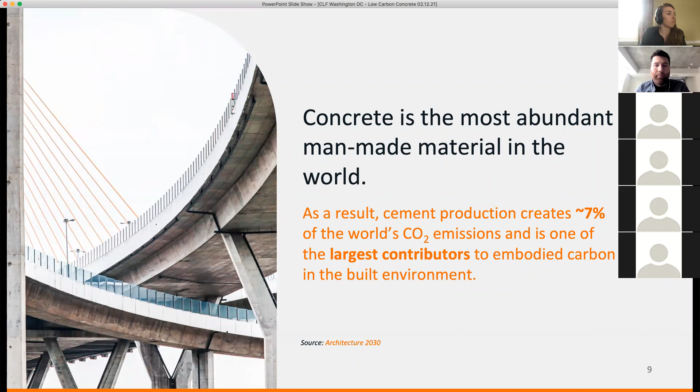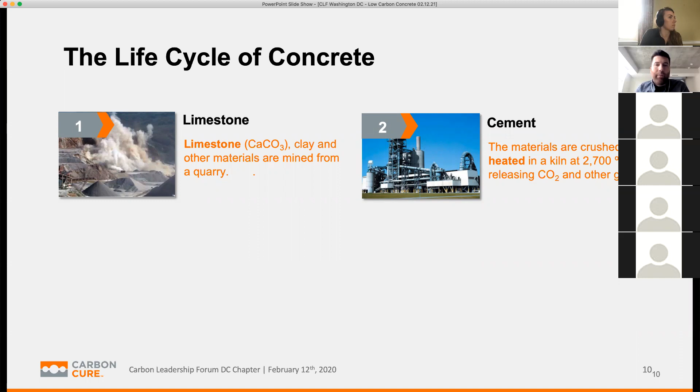When you look at how concrete is made, it might not be something you spend a lot of time thinking about. Concrete really originates from the natural world. It starts off as limestone in a lot of respects, a natural material that we are mining from different areas in the country. Limestone from a chemical perspective is known as calcium carbonate. Other materials like clay are mined from quarries, and they're ultimately taken to cement kilns where they are crushed and heated up and processed, at a really high temperature of 2,700 degrees Fahrenheit. That process itself is quite carbon intensive, which I'll explain in a second.

Once you have cement products, you can make the great material we're here to talk about, which is concrete. That's probably the thing you're most familiar with seeing, these trucks on the road coming from Vulcan and Superior and other local producers, ending up ultimately at job sites. For those of you on the development and design side, you will see these trucks arriving, pouring the concrete, and that's ultimately what we have to live in, work in, play in, that structure.

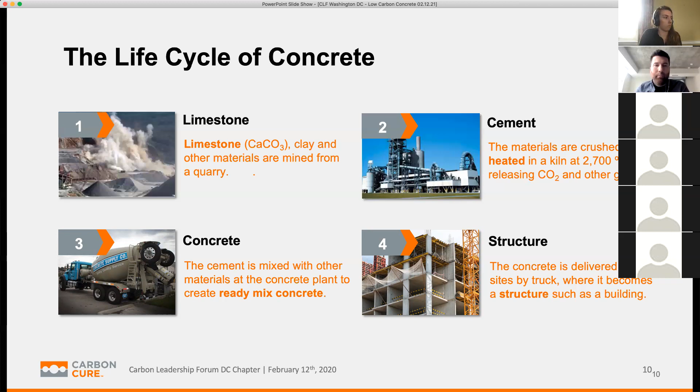Looking at that outline, if you want to understand carbon with concrete, you really need to think about understanding cement specifically. As much as 80 to 90% of all carbon emitted in the manufacturing of concrete occurs in that second stage, the cement manufacturing stage. That number can be lower, it really depends on a lot of regional factors, but generally speaking, cement is always the largest source of carbon inside of concrete. One analogy to think about, if you want to distinguish cement and concrete, cement is more like a sugar or a flour, and the concrete is more like a cake or the end product. Keep that in mind. Cement and concrete aren't the same thing. They're commonly confused, but cement is really a constituent material of concrete.

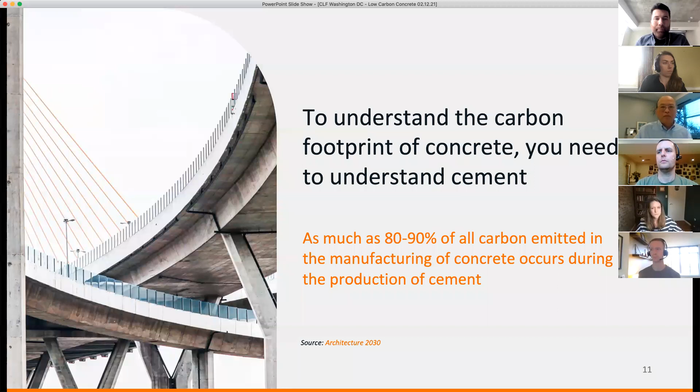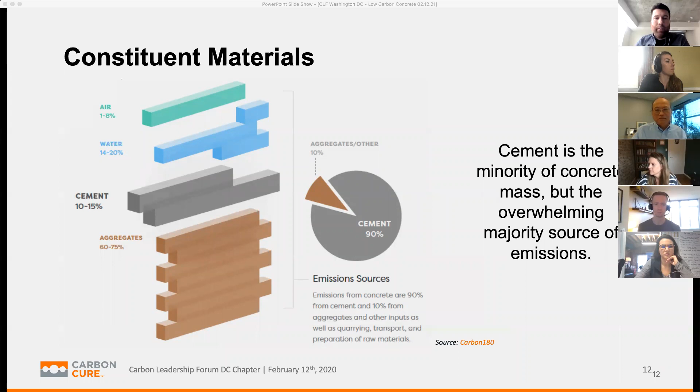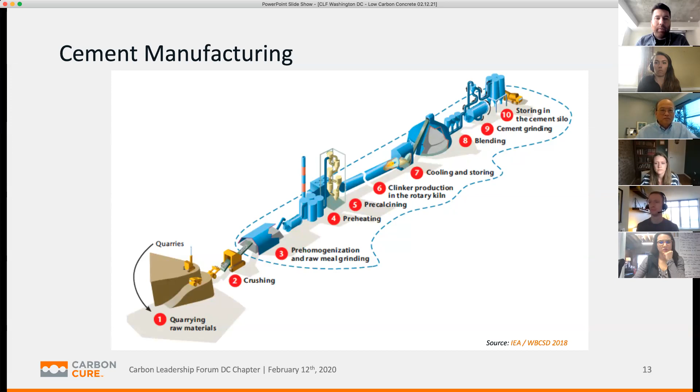Looking at that process, I want everybody to have an appreciation for just how challenging it is to decarbonize this sector. Everybody wants simple, straightforward solutions to getting to a low carbon future. But when we talk about cement in particular, this is not an easy thing to do. The reason is that unlike a lot of other sectors, where you could just switch to a green power source and see pretty significant carbon reductions right off the bat, in this case, when we talk about cement, we're talking about a process problem.

The process problem is that everybody wants cement products to be used for construction, but what they don't acknowledge or realize is that to get to that product, you need to actually manufacture CO2 as a byproduct. Cement's origins are largely limestone, or calcium carbonate. When you heat that up under pressure in a kiln, you end up getting a split in that molecule, which leads to the production of calcium oxide as one half, and pure CO2 as the other. So for every ton of cement manufactured in the United States, somewhere in the order of 1.04 tons, like a 1-to-1 ratio, of CO2 is manufactured.

That's something to consider for all of your projects. Every pound, every ton of cement that gets purchased, that's the direct impact associated with that material. This is an interesting, unique challenge. Keep in mind that cement producers are doing a lot of things, but this is a fundamental chemistry question, not so much a judgment or choice question.

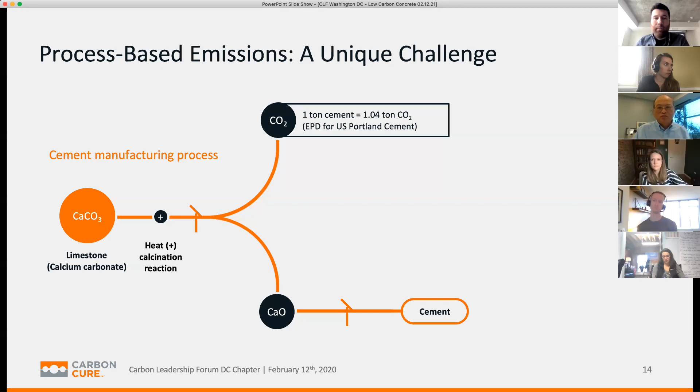Once you have cement products, then you get the rest of those materials I was showing in that previous image, the other constituent materials of concrete: the sand, the stone, the gravel, water, different admixtures, whatever it is that you need to make the product. And then ultimately you have concrete.

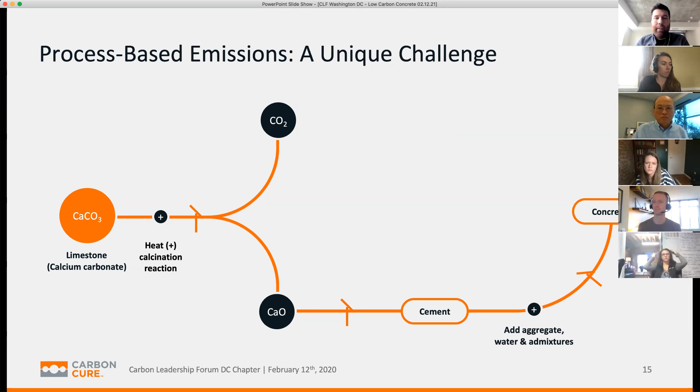Let's switch tactics here and talk a little bit about what is the carbon content of concrete. What do we actually know about that? And if you wanted to make decisions around carbon content of concrete, what would you actually have to do? That may sound like a basic question, but it's actually quite complicated, because we're looking at materials and trying to say, okay, this is how much carbon is inside of it, if I wanted to make a decision based off of that.

The answer here is there's new tools coming on the market around life cycle assessment and environmental product declarations that are meant to try to answer this question. The easy analogy is if you go to the grocery store, you might be looking on the back of a carton of milk, and it might say there's this many calories, or this much sugar, or this much fat. That's meant to help inform you. These products are meant to do the same thing, except around environmental impacts of materials. So for those of you involved in LEED, this is old news.

You don't need to hear me tell you about this, but in general, these are tools that are meant to quantify the impact. And they do that using a really complicated set of assumptions around what the energy sources are, where materials are sourced from, how far they have to travel to job sites. There's lots and lots of different assumptions built into it.

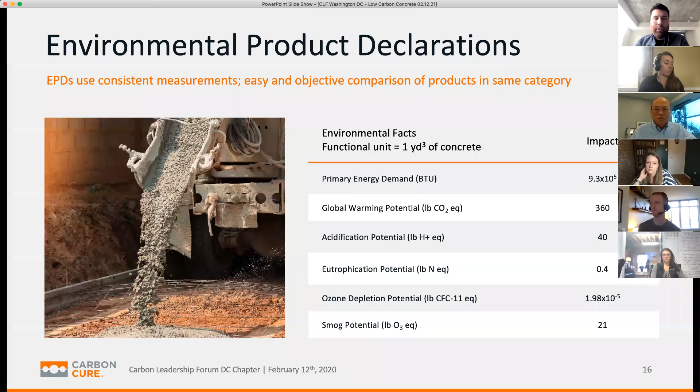So what you would do with those EPDs if you wanted to know the carbon content of your project is look at the material quantity you're talking about. Let's say you're buying 10,000 cubic yards of concrete. From the EPD provided by the producer, the average carbon content of that material is X. You would multiply those two things together and add them to other calculations for other materials, and then you'd get your whole building estimate for the carbon content.

So the key thing to consider here is we're talking about embodied carbon. We're really talking about a comparison or comparative analysis, because at the end of the day, you're basically quantifying what you're not producing, right? So how do you measure a negative? To do that, you have to have a baseline. So that's something to consider here as well.

When you look at EPDs, the question isn't really what does that EPD say. It's what is the differential between that EPD versus what an industry average or local average would look like. And the difference is really what matters here. That's the reduction, so I hope that makes sense. But again, it's not so simple as just measuring it and saying that's the answer. You have to compare it to something.

And in a lot of cases, understanding what a good baseline is, is also somewhat confusing or challenging, depending on the local data available.

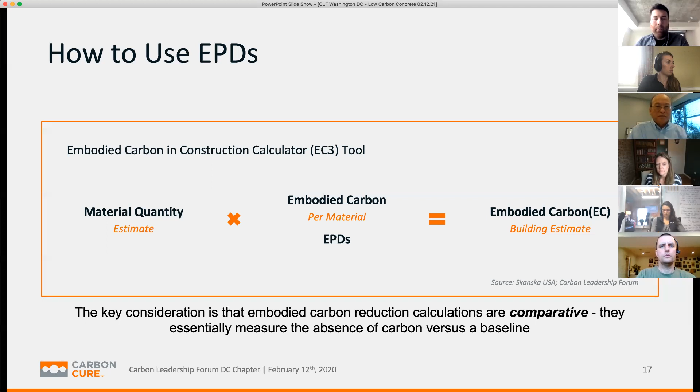So I mentioned a couple of reasons why concrete might have a fairly impactful level of carbon associated with it. I don't want you to get the impression that concrete is a bad material from a carbon perspective. Some of the fantastic things concrete does are things like reducing thermal mass heat transfer. So if you're looking at long-term durability, resiliency, or energy efficiency, concrete is one of the best materials out there for all of those things.

So again, part of why it is used so frequently is because it does all of these performance attributes extremely well. And in addition to that, although there is a carbon impact, it's not like we're talking astronomical scales different versus other materials.

They're fairly comparative. And the real challenge here, I think the question people kind of ask, again looking for a simple answer, is should I just build everything out of wood? Should I just build something out of steel? Should I build it out of concrete? What is the easy answer here?

I think what I'd like you to consider is that that's actually the wrong question. Asking which material is better from a carbon perspective like this is not really a good way to think about it. The better way to think about it is that all of those materials are going to continue to be used everywhere. We're going to need all of them. And the question is, how can we do better across the board in each and really drag the carbon content down for all of them using different strategies?

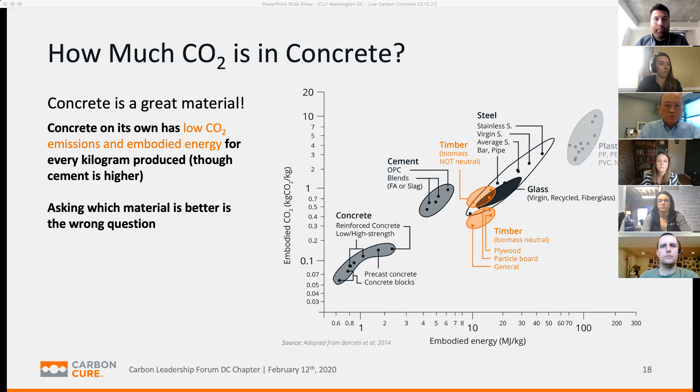Getting back to the question of how much carbon is in concrete and why that's challenging: almost no two concretes are alike. You can have concrete of the same strength but with different purposes, so it will have different characteristics intentionally. Going back to the cake analogy, you can take flour, butter, and sugar and make cookies, cakes, or bread - a million different things. It's the same with concrete: depending on the ratio of materials and the desired outcome, you can make all sorts of different kinds.

If you look at the strength of concrete you're looking for, higher strength means more cement, therefore a larger carbon impact. Also look at the quality of aggregate materials - some local sources are just better quality, so you need less cement for that purpose. In other cases, you're looking at replacing cement - Teck's going to speak to this more directly in terms of some of the materials out there, but you can actually replace certain percentages of cement with other materials.

Also just look at where materials come from. If you are buying products from Turkey and shipping them into the USA, that's obviously going to have a carbon impact associated with shipping those materials to the site. Similarly, if you're driving to a remote site, all of those trucks on the road do have impacts as well.

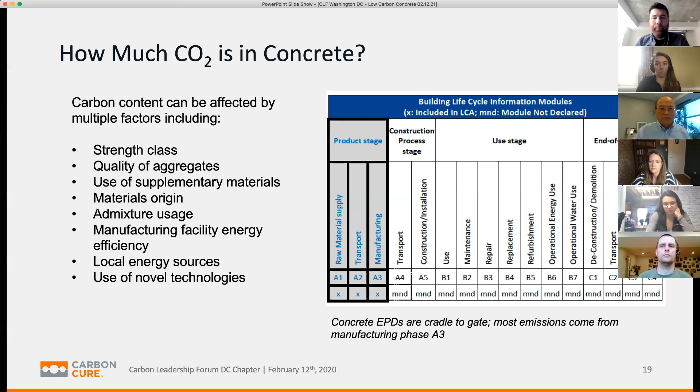And being Canadian, I appreciate that, but I know sometimes it's not so much appreciated in the US.

One other thing I mentioned is the importance of baselines and comparisons. So what does this mean for this EPD? You'd really want to compare it to some other baseline concrete mix out there and see how much lower this would be from standard practice.

I owe a lot of the content in this presentation to the National Ready Mixed Concrete Association. If you're not familiar with their work, check out their website, nrmca.org. They publish EPDs for a number of different producers in their database, and they publish industry averages as well. If you're interested in looking at EPDs, their EPD program is a wealth of data worth checking out.

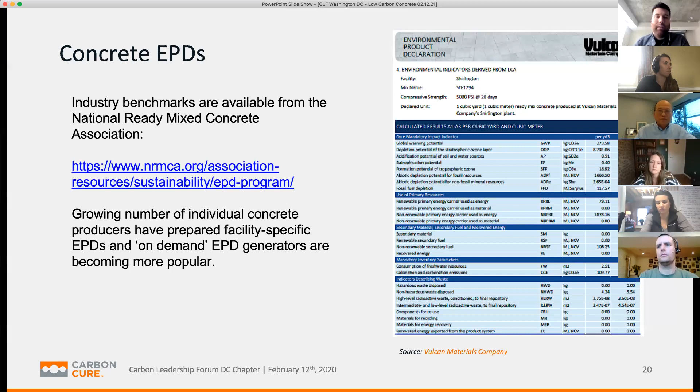So there are tools being developed that will allow producers to make more of these EPDs on demand. Basically, you could say I'm using this source and this material, and the buyer has a specific strength in mind - I can actually generate that estimate in real time. That's not a free thing for a producer, but there are evolutions of this coming out to help answer the question for concrete specifically.

Referencing the National Ready Mixed Concrete Association again, this is an example of what the industry average looks like. Teck's example was showing that for the 5,000 PSI mix, it was around 270 kilograms. In this case, the National National Ready Mixed Concrete Association shows that 5,000 PSI mixes typically range between 316 and 522 kilograms - you're seeing the minimum and maximum on the left. The industry average takes into account different producers in different regions with different energy grids and different standards and practices.

The key thing I wanted to show is at the top - the labeling is kind of hard to read, so I'll explain. You see one that says 4001-5000-00, FASL. FA means fly ash, and SL means slag - those are cement replacements that Teck will speak to. What that's showing is a standard mix that only uses cement, and that mix should be somewhere in the order of 522 kilograms of CO2 per cubic meter of concrete.

As you go down the list, those numbers go down. The next label says 4001-5000-20-FA, meaning this mix has 20% fly ash replacement of cement. You can see that one has something in the order of 60 to 70 kilograms less CO2. So the more cement replacement you make, the greater the reduction in CO2 on average - that points to the fact that cement really is such a defining factor here, that changing 20% of the content gets you a 60 to 70 kilogram reduction in CO2.

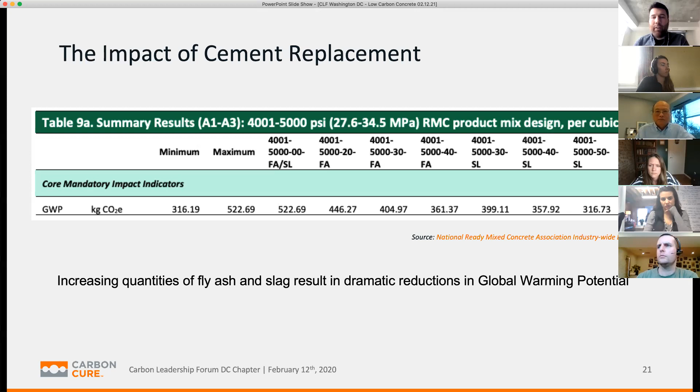So I talked to you a lot about what is today, what the reality is, where we are, some of the ways you can think about carbon and concrete. But I wanted to spend a few minutes here talking about tomorrow, or the future.

One thing to understand with concrete is that just switching to green energy is not going to solve this carbon problem. The industry has a much greater challenge, and a lot of that comes from the fact that process-based emissions, the manufacturing of cement, makes just a lot of CO2.

So what this chart is showing you is that some of the traditional strategies, like energy efficiency or switching fuels to greener sources, are actually going to only accomplish a minimum amount of carbon reduction. Even if everybody was running on pure wind power, you might get a 15% reduction or so in the carbon impact of concrete.

It's really the two strategies at the top that are going to be the most influential. And those two things - I'll start with the one that's the darker orange, which is labeled as reduction of clinker to cement ratio. What that means is, again, that replacement of cement with other materials like fly ash or slag.

So what that is saying is that if you really want to achieve a lot of decarbonization, you need to find a way to just use less cement. The trick there is that we don't actually have enough materials like that to have a global scale of replacement at the level needed. But there's a lot of research underway in terms of finding different materials or additional material sources, and I think Teck will speak to some of this too, where you can actually replace cement with different materials and get high replacement percentages.

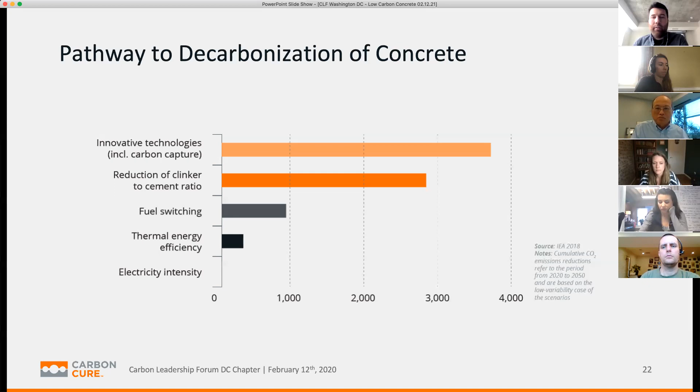So I spoke a little bit about fly ash and slag, and I just wanted to talk a little further about some of the cement alternatives out there. Looking here, you can see all these very nicely colored, nicely hued powders. So anybody who gets excited about chemistry, this is all the good stuff there.

You can see some of the typical names up there - fly ash, so FA, furnace slag, silica fume, and others that are used. But there are also emerging new materials being investigated that could do the same thing. What these materials do is basically act as a substitute for cement - they replace it typically at a 1-to-1 ratio in the mix, and then you'd see a corresponding reduction in cement.

These materials are referred to as pozzolans, or having pozzolanic properties, and they generally react with calcium hydroxide coming from the cement to provide cementitious properties. Just as a key thing here though, these materials aren't fully benign. They can have other effects on properties such as set time, coloring, and other properties of concrete. So they're not something you could just switch on and off and expect nothing to be different there. But they are products that are available and are emerging.

So some of the ones that are growing for new demand - there's a new company in New England that is focusing on producing ground glass materials that could theoretically be used this way as well. Other ones you hear talked about are calcined clay and metakaolin. So there's a few other materials being explored. But this also goes all the way back to ancient Rome, where some of the first concrete was made using volcanic materials. So that same activity is what's being tapped into here from a chemical structure standpoint - they're just coming from different source points.

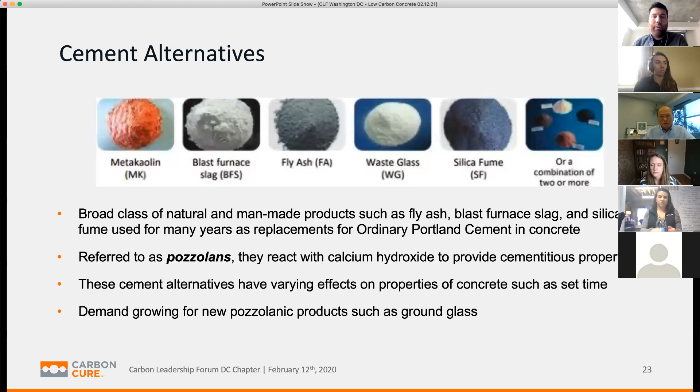So going back again to that carbon capture, utilization, and storage topic, this just shows you some examples of how that might work. What you're seeing here is, if you're looking at an industrial CO2 production source, you can either take that and jam it underground, which is called sequestration or storage - that's typically done in former oil and gas reservoirs. You can also take the CO2 and use it for other purposes, shown in the orange and green text. The most interesting one for concrete is at the very top there, listed as mineralization - that means converting that CO2 into a solid mineral as part of concrete materials.

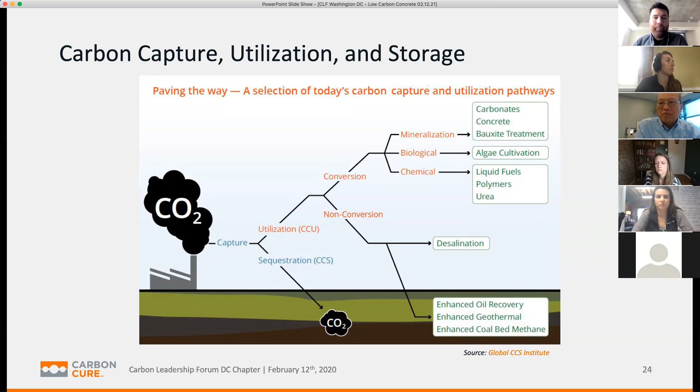So another thought I wanted to raise, looking at the audience on this call, is that everybody is interested in lower carbon products generally, but I want you to consider that it's not necessarily just a technical problem, not necessarily just a technology problem. It is in a lot of ways a behavioral and structural challenge. This is built into how we design and build buildings. It's a problem for all sorts of reasons, everything from cost efficiency to stakeholder engagement, to all these different kinds of things that exist when you have 4 or 5 different players at the table and a very defined sequence of events for traditional design-bid-build projects.

So some of the challenges that exist if you're a concrete producer, that affect people like Teck as they do their work, is that a lot of engineers may have specific prescriptive requirements that call for necessary levels of cement to begin with. That's also true in the public sector. There may also be pressure for high speed - if you're building a multi-story building, every day you have a worker on site is costing you money. So in a lot of cases, people make the choice that just putting in more cement to make the concrete strength rise more quickly is cheaper than hiring more people.

And then looking at this disaggregated responsibility - we all play different roles. And finally, carbon is not really built into the cost budget balance sheet there, so it's not considered the same way other costs are.

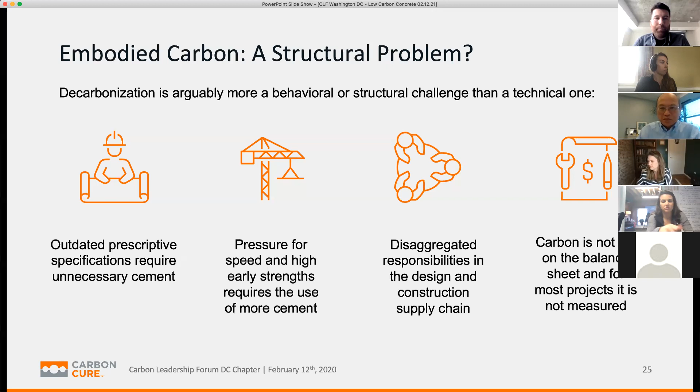I'm going to quickly touch on some public policy side, and I'm going to pass it over to Teck. I think I'm probably going a bit long on my time here.

But looking at local governments, one thing that's come out of this is that people are starting to look more consciously about the choices they're making. This is a study I'm referencing from the city of Portland in Oregon, where they looked at their different mixes used just to make sidewalks. What they found was that they could cut up to 25 to 30% of the carbon content of those mixes just by simply changing how they ordered it, how they specified it, how they asked for it. They didn't have to do any new revolutionary things here, and they didn't really pay more for it - it was just a question of choice. So if you're on the public side of the equation, just be aware that a lot of the time we do things because they're simple, and no one's really gone back to look at why things are done the way they are.

When you look at it, you can uncover that there's actually a lot of things we could be doing to make this more carbon efficient without affecting price, schedule, or things like that. That's really important because government directly or indirectly buys 40% of concrete made annually. Most concrete is going to things like parking lots, foundations, and sidewalks, not 12-story buildings. The two biggest drivers for any concrete producer are typically new housing or building starts, and government infrastructure spending on things like bridges and infrastructure renewal.

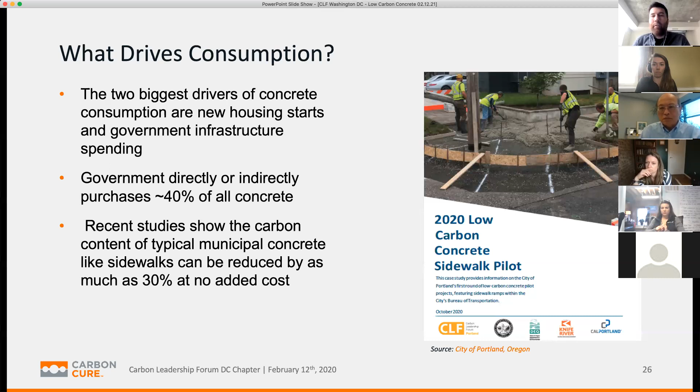If you want to learn more about the current evolving policy discussions, I'd encourage you to check out some of the ongoing work. States like Washington, New York, and New Jersey have proposed legislation that would push state agencies to consider carbon in their procurement of concrete materials specifically. Other states are looking at doing this for all construction materials, but these are probably the most advanced and sophisticated. These are referred to as New York Senate 542 and New Jersey Assembly 5523, which push for consideration of carbon in all state purchases of concrete.

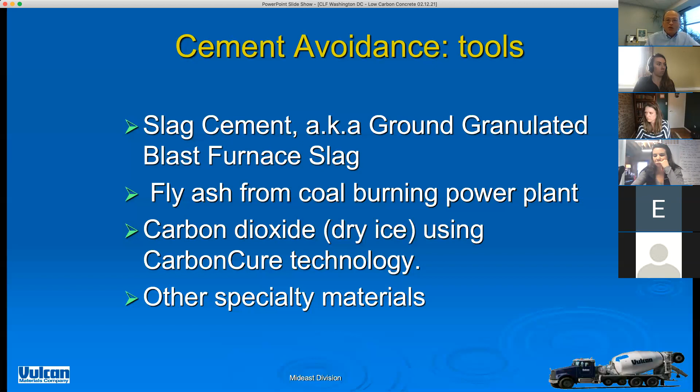Next slide. Eric also talked a little bit about concrete, so let's talk about concrete 101. Concrete is really simple: it's adding cement, aggregates, water, some admixtures, and that's all. You can mix this up in your backyard if you choose to. You can go to home improvement stores like Lowe's or Home Depot, buy bag cement, get some aggregates maybe from Vulcan, and voila, you can go to town mixing your concrete for your patio or whatever.

But it's gone from that very simple formulation to, in a modern ready-mix producer in a big metropolitan area like DC, pretty sophisticated. Under each material ingredient, we have different items that we can use—like under cement, SCMs we talked about, and Eric has shown some of that in his earlier slides.

And then aggregates, you can get crushed stone, manufactured sand, washed gravel, natural sand, and recycled aggregates, like taking concrete that comes back to our plant as leftover from a project. People ordered 10 yards, they only use 7, and we got 3 yards coming back. What do we do? We can crush that concrete up, and that becomes a good recycled aggregate that can be used and put back in concrete.

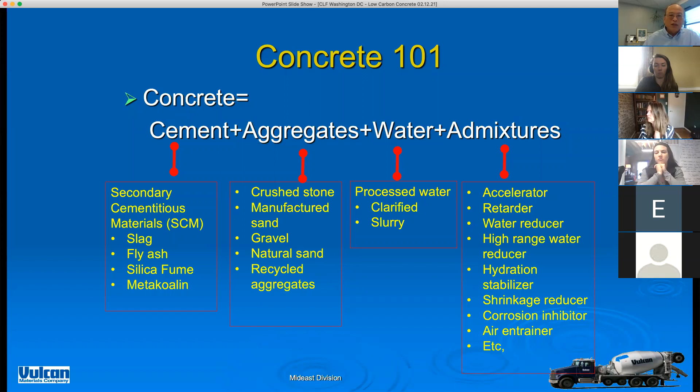Then admixtures - the admixture manufacturers are really the ones leading the advancement of concrete technology. They come up with all sorts of stuff. You can make concrete set faster using accelerating admixture, or make it set slower, holding it for a day, a week, or a month if you want. They have the chemicals available to do that. Then you have water reducer, and a more potent form called high range water reducer, formerly known as super plasticizer. They make concrete very highly workable and so on. So it goes on - it's not an exhaustive list.

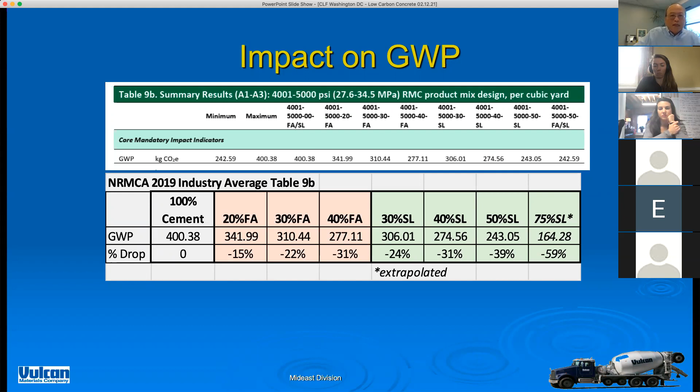Okay, I want to give you a little bit of detail about what each of these materials is. So for those who are unfamiliar with it, we'll start off with slag cements.

Slag comes from steel or iron refineries. When you take iron ore and melt it to refine it, you have a lot of impurities in that iron, and those impurities float on top of the molten iron. That's really the scum floating on the molten iron, and that's slag. You divert that slag, separate it from the molten iron, and quench it with water - pounding lots of water on it. Somebody told me they pour like 10,000 gallons of water per minute on that slag. Rapid quenching produces a glassy material, and in the process what they produce is very small glassy granules. Then they drain the water off and put it in a grinder, ball mills actually, and grind it into grain sizes smaller than Portland cement. So that's what you get - slag cement.

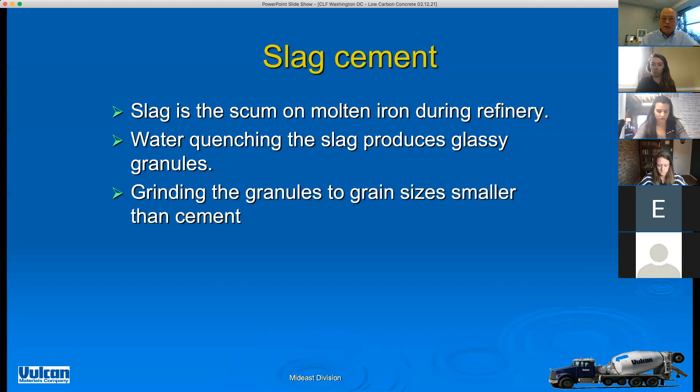Just a little comparison to explain why slag, as a secondary cementitious material, is not as reactive as Portland cement. One chemical compound we look at is CaO, calcium oxide. With slag, according to ACI, it ranges from about 32 to 45% depending on the source. Portland cement is around 62% calcium oxide for this particular cement. The more calcium oxide you have in a material, the more reactive it is.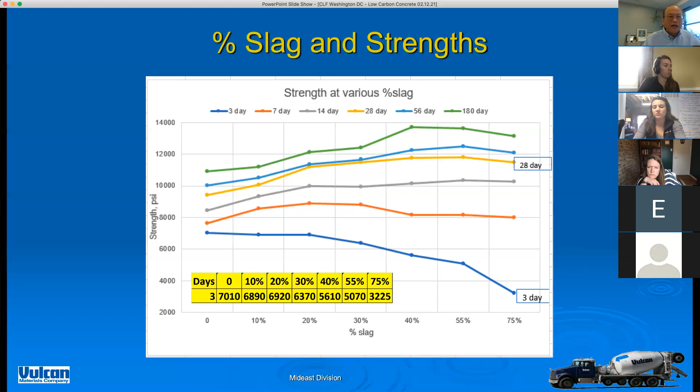Okay, well, fly ash. What is fly ash actually? In coal burning power plants, you burn coal and get ash. That ash flies up the stack, that's why it's called fly ash.

By EPA regulations and emission standards, power plants have to capture that ash. They use various means like electrostatic precipitators to capture the ash and drop it into containers. So you get a bunch of containers capturing that ash, and that's how you get fly ash. There's a companion to fly ash called bottom ash, because those are the ash that drops to the bottom of the smokestack. Very creative names there.

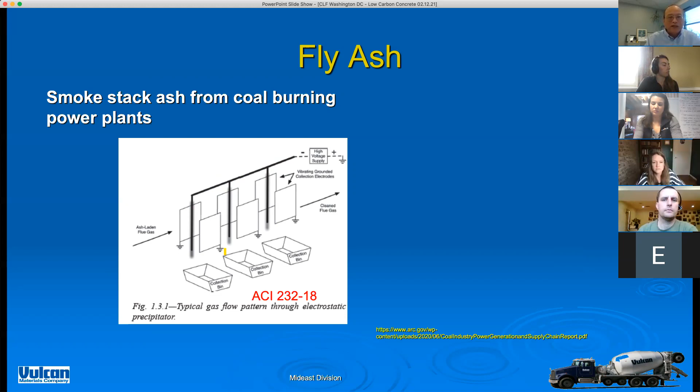The coal in the eastern seaboard comes from the Appalachian coal. There's lots of coal in the Appalachian region, and because of the type of coal, it produces what we call type F fly ash - the ASTM classification, ASTM C618 class F fly ash. So class F fly ash is only available on the East Coast.

There's another fly ash called class C fly ash. That's more of a Midwest to West Coast phenomenon, because there's a different kind of coal in that region.

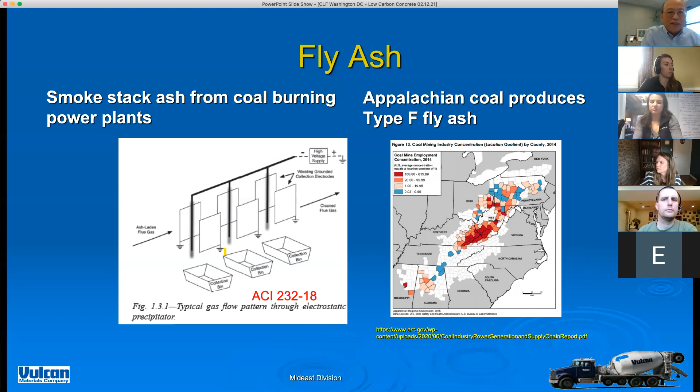Again, looking at the calcium oxide content, you can see that class F fly ash is very, very low in calcium oxide - 3% is what we're looking at, compared with 62% from Portland cement. So that's not very reactive at all.

Matter of fact, when you mix fly ash with water, it's going to stay unhydrated forever and ever. We have ACI certification classes, and technicians have to run through various test methods in concrete. One of the things we call 'fake concrete' that we use is actually just simply fly ash. After they're done testing, they can dump that sample back into the pile, and that pile's been there for 10 years, and we keep using it and keep using it. So that shows how unreactive fly ash is.

Relatively speaking, slag cement, if you add water to it, is actually going to get hard. Slag and water - it's hydrating. It can get hard, and it can get some significant strength with it.

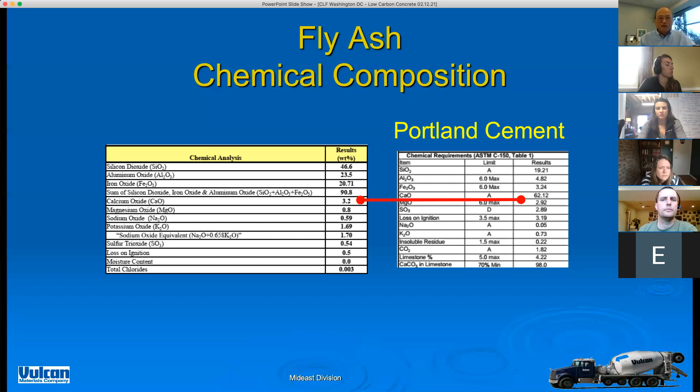This is another comparison of the percent of fly ash and its impact on strength. On the curve on the left-hand side with 15% fly ash, you see that the fly ash starts off lagging the reference 100% Portland mix. But by the time 28 days comes around, it actually crosses over, meaning the fly ash starts to generate more strength as you go past 28 days.

Now conversely, if you look at a 30% fly ash mix, the crossover doesn't happen until about 70, close to 75 days later. So that gives you an idea - if you recall from the strength development curve with slag, the crossover happened much sooner. So it's just the behavior of different materials.

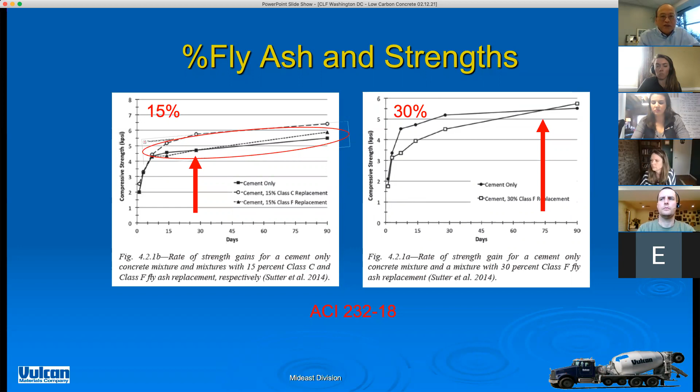This is not going to go into much detail - we're talking about adding CO2 to concrete. That's the chemical reaction that takes place, and basically we're generating calcium carbonate, or really limestone, in the process.

One of the advantages that Eric didn't mention is that the limestone that is generated is very different from the limestone that cement companies add to the cement when grinding their clinker. The limestone generated using the CarbonCure process is nanoparticle size - very, very small.

Okay, so you go from micro all the way to nanoparticles. There's a lot of advantage with nanoparticle size in terms of how it affects chemical reactions in concrete, chemical hydration, and so forth. I don't want to get into that, it's really, really technical.

But suffice to say that the CarbonCure technology permits us to have a form of carbon sequestration, locking up that CO2, but it's locking it up forever, for as long as the concrete lasts. It's changing into a different chemical compound altogether. It's like the cake and flour example - you add flour and bake a cake with it. What happens? You basically sequester that flour forever and ever, right?

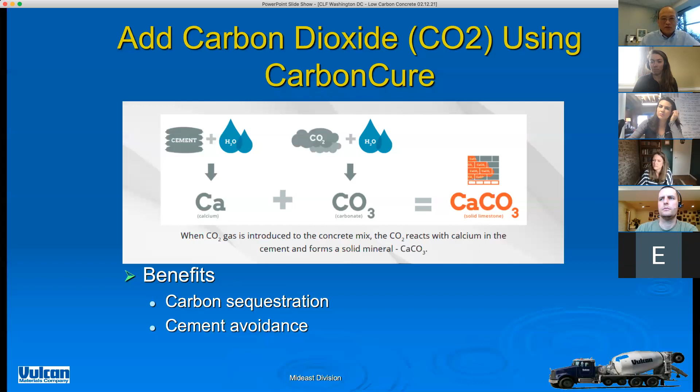And also it helps us, in terms of concrete producers, to avoid using more cement. Next slide, please.

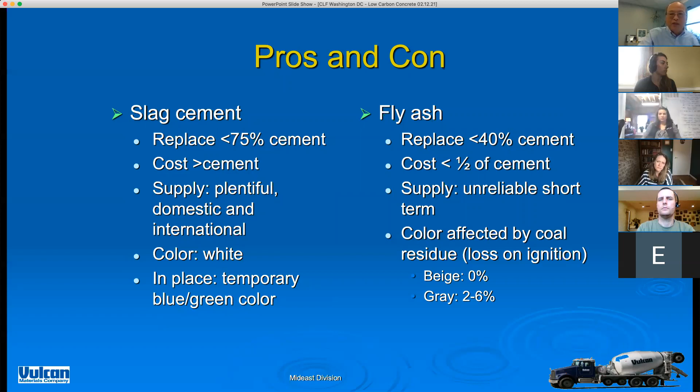So the pros and cons of the two different materials. Looking at slag cement on the left, it replaces up to 75% cement. That's the typical usage that we do, sending those kinds of concrete out. The high slag content is typically used in mass concrete, where we're trying to keep the temperature of the concrete within a certain specification limit. Cement is the heat generator, and therefore avoiding cement makes perfect sense. And voila, it's good for generating very low carbon concrete as well.

Then the cost of slag - the cost of slag can be greater than cement. Some of my plants that are further away from the slag mills, because the trucking cost is actually, we're actually paying more for slag cement. As far as supply, it's plentiful, as long as a steel refinery exists, they're going to have slag. So the slag that we're getting, this glass granule that the slag mills get, some comes from international sources, some comes from domestic sources.

There's a slag mill that LafargeHolcim has up outside of Baltimore called Sparrows Point. It used to be Bethlehem Steel back in the heydays, where Bethlehem Steel was making a lot of steel and a lot of slag, and the slag cement mill was built there to process that slag. But Bethlehem Steel is now defunct, went bankrupt, and that steel mill is no longer there, it has been torn down and so forth.

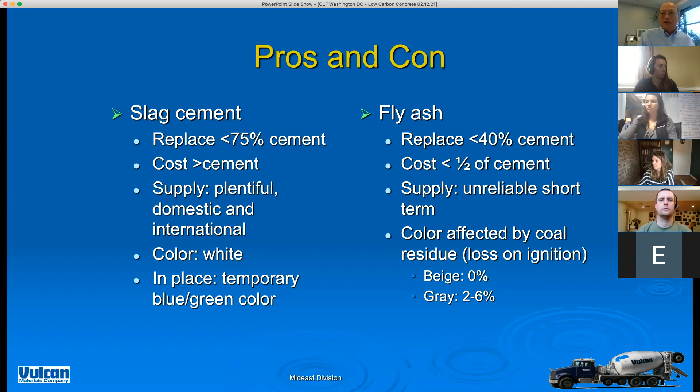Next slide, please. The specialty material we're talking about is type 1L cement. Type 1L cement is permitted to have a maximum 15% limestone addition. So you add 15% limestone to the cement, you can use 85% or less clinker. So there's a lot of cement avoidance there, significant cement avoidance. That's compared with 5% maximum for regular cement that we use.

But the cement companies typically don't go to the max. It all depends on cement chemistry and so forth. At the end of the day, the cement companies want to produce a cement product that has optimum properties that the customer likes. I know locally there are two sources of type 1L cement. They range from, I think, about 10 to 12% limestone. They don't go quite up to 15%. Likewise with regular cement, they don't go to 5% either, they're somewhere in the 2 to 3% range. So it's available in the market.

But as far as getting it in a plan, it certainly depends on the project size and stuff like that. As a producer, one of the big constraints we have in our plant is limited storage capacity. We've got cement bins, and we got to have enough storage capacity to meet the daily demand. Because we're trucking the material from, say, 60 to 100 miles away, you get tied up in beltway traffic, not now of course, but you got trucks tied up, and we can only store, say, 3 or 4 loads of cement in a plant, and we got a big pour. We got to be thinking about the sequencing of trucking materials, cement coming into the plant and so forth.

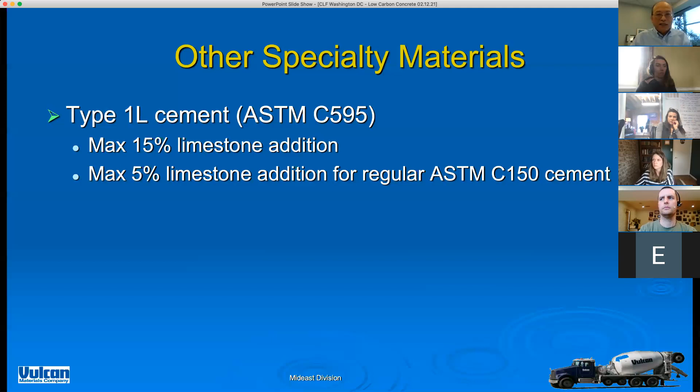Great, thanks, Teck. My name is Michael Cropper. I'm a senior associate here with Thornton Tomasetti. I'm a structural engineer by training, so everything you hear is my thoughts as a structural engineer, based on my experience and our experience. At Thornton Tomasetti, we've got various practices including structural engineering and sustainability, and the embodied carbon topic really is a good nexus for both of those practices.

Following on from Eric and Teck's presentation, I wanted to start to talk a little bit about how this looks on a project and what we can do for specifications. As Eric alluded to earlier, there's only so much we can do with materials, so much we can do with innovation, but a lot of it's going to come down to design approach, just philosophy of our industry and projects moving forward. That's a much wider topic, and I think the intent is that this forum will get into that more in coming sessions. But for now, I just wanted to start with a discussion of specifications and a little bit of how we've implemented some things recently in our region. Next slide, please.

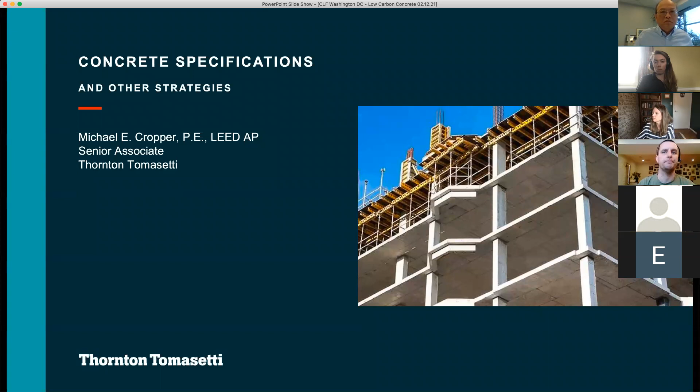One of the things we're seeing more of, especially with regard to embodied carbon, is this idea that our concrete specifications should be more performance-based. We as engineers, working with the architect, know the performance requirements, constraints, and aesthetics of the concrete we're looking for. Those requirements should be in the documents and specifications, but we should not be setting limits on cement replacement, water use, or other admixture use, because we don't know better. We're not the experts. The idea is to have these performance-based specs to remove constraints and allow innovative products.

Allow the use of things like maturity sensors, allow longer cure times. Really, the idea is to let the experts, the mix designers, the producers do their best work, coordinating with the general contractor, the subcontractors, schedule, transportation requirements, placing requirements, finishing requirements. Really open it up to the team to be creative, to go low with embodied carbon.

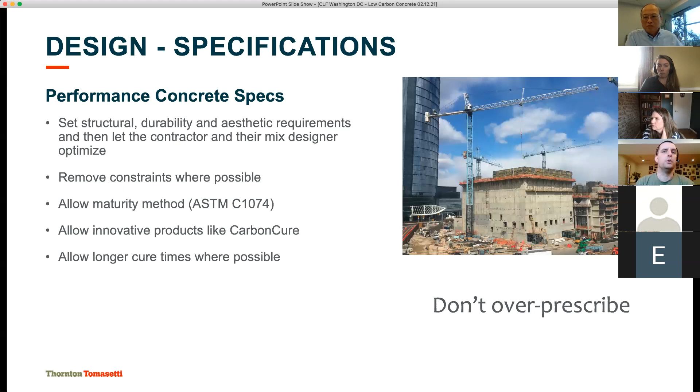The key point I put on the right is that specifications must be biddable. You can't just cross your fingers and hope you're going to get low embodied carbon concrete from your subcontractors. You've got to set targets. If you're going to give the contractor the freedom to operate, you need to provide targets and limits to hit. Some of that comes from what can be done in the region, what the experience is, and then whether we can push to go lower.

One of the things that may be needed for compliance requirements is to require EPDs for each mix. Our current Thornton Tomasetti specifications provide a benchmark average from NRMCA, the National Ready Mixed Concrete Association, for our region or whatever region the project is in, to say this is the benchmark and we're looking for a certain reduction. The idea is not to impose a reduction on each specific mix, but to ask what is the total reduction you're trying for in the structural frame.

Unless you're in a design-build situation where you might want to specify a total embodied carbon reduction for the project as a whole, you're going to be bidding these out to different individual contractors. So it's better to keep concrete within concrete and set those targets per material and per the volume of material on the project. That gives the contractor the freedom to say, well, I'm going to use 70% slag replacement in a mass foundation and get a large reduction in embodied carbon.

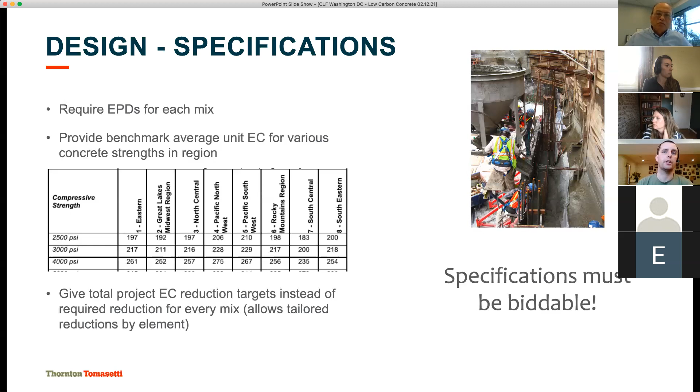Speaking of the targets for reduction, this is really important. Everything about embodied carbon requires collaboration across the whole team. It starts from what the project goals are, what the owner's goals are, what the architect wants from the project, how the sustainability consultant is approaching the project, and then how everyone can work together to achieve the vision. You have to know what the baseline is.

Is it a project-wide target? Is it specific to materials? Are we saying, well, 70% of the embodied carbon in the building is in the concrete, so we're going to try to do what we can for that 70%, and we just don't know enough about the other materials, so we're not going to worry about it?

What baselines are we using? Are we using Carbon Leadership Forum baselines, which right now are really national averages and may not always be appropriate? Are we using NRMCA regional averages? Is there enough data in EC3, or in maybe a developer's portfolio, or our collective project team experience, to say these are the averages we should be hitting for this type of project in the DC region? Is it based on building type? Our experience at Thornton Tomasetti is that it varies widely based on building type.

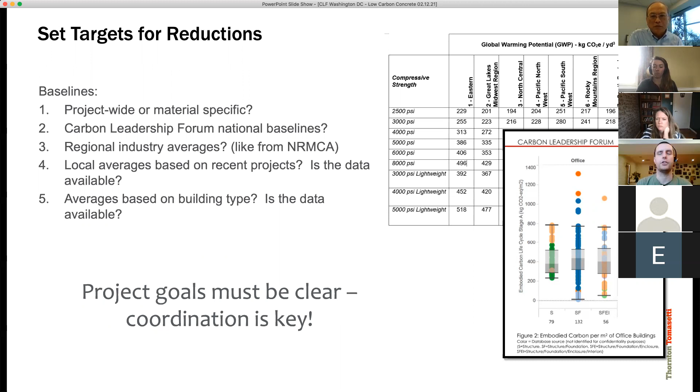Just wanted to touch on concrete maturity sensors, since it's somewhat new in our region. It's been used for years in tracking heat in mass concrete pours, but we haven't seen the full potential of maturity sensors here. These are little temperature sensors that go in a concrete pour and wirelessly beam temperature history data that can be calibrated ahead of time and monitored throughout construction to gauge in-place strength. The temperature history gives you a maturity index, tied to the strength of the concrete.

So it's a way we can optimize cement content, because if we know the actual in-place strength of concrete and are less reliant on cylinders and the time it takes to collect, break, and report them, maybe there's an opportunity to eke out a few more hours of curing at no real cost, providing additional schedule certainty. Our Chicago office has a few years of extensive experience with maturity sensors. It's not something the design team specifies or requires of the contractor, but it's something our specifications allow for if the contractor would like to use this method.

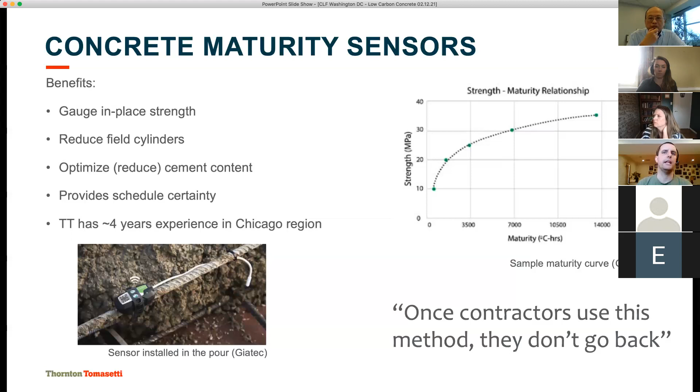It's covered by ASTMs, in use across the country, and a viable way of doing things. The quote from my colleague in Chicago is that once contractors use this method, they don't go back. We've seen a lot of local excitement on this front, but not a lot of local implementation yet.

I wanted to end with two quick slides about implementation, because embodied carbon reduction as a targeted project goal is very new in our region. The West Coast has been doing it for years, they're good at it, but still learning. In our region it's very new, and a year or so ago there wasn't much data in EC3 for our region, or any at all. Now that's starting to change.

One project I wanted to highlight is an office building, a case study with post-tension slabs. The project started with pretty aggressive embodied carbon reduction goals set by the owner. The contractor is using slag in the post-tension slabs, major cement replacement at mass foundations, at the mild steel slabs, and at vertical elements like shear walls and columns. We're seeing 30+% reduction in embodied carbon on this project, so it's very exciting.

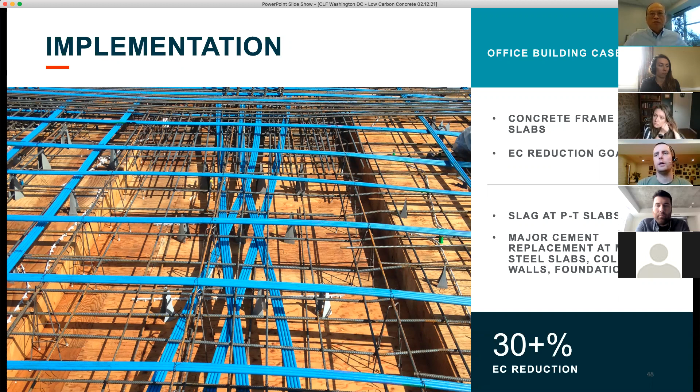The strategies we used for this, and these are topics this forum is going to get into in much more detail in future sessions as the whole region learns from each other, included early collaboration with the owner, the contractor, the architect, the sustainability consultant, and us as the structural engineer.

We replaced cement where it made sense, allowed longer cure times where it made sense, and used CarbonCure, this incredibly innovative product that admittedly showed up on a couple of Thornton Tomasetti projects four or five years ago, though we didn't really realize it was there because it showed up in the mix design. As a structural engineer, I didn't know what CarbonCure was five years ago, and it has no adverse impacts on the structure. It was being used before we knew it was there, and now we allow for its use in all our projects—it's one more tool in the tool belt.

We also used concrete maturity sensors to gauge in-place concrete strength. This project also required generation of EPDs for the mixes, something the subcontractors hadn't done to that point. With concrete, you can pull so many levers during mix design that almost every mix can be different.

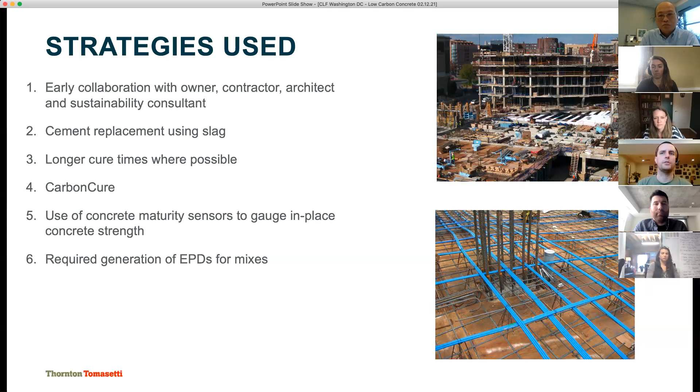Maybe I'll start and then let others chime in, but we ran into this exact problem, Lauren, with nothing in EC3, or very little in EC3, at the time. There's not a lot of, you can't just say, all right, all the Vulcan plants and all the Superior plants within 20 miles of DC, we can look at these averages and benchmark things this way. And I think the biggest key here is, hopefully starting with, I think we have to start somewhere, right? So in my opinion, we've got to start with the NRMCA regional averages for our region.